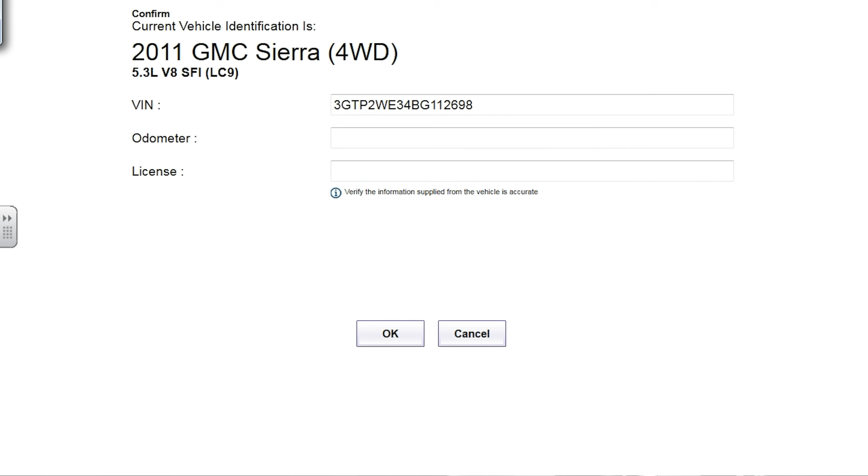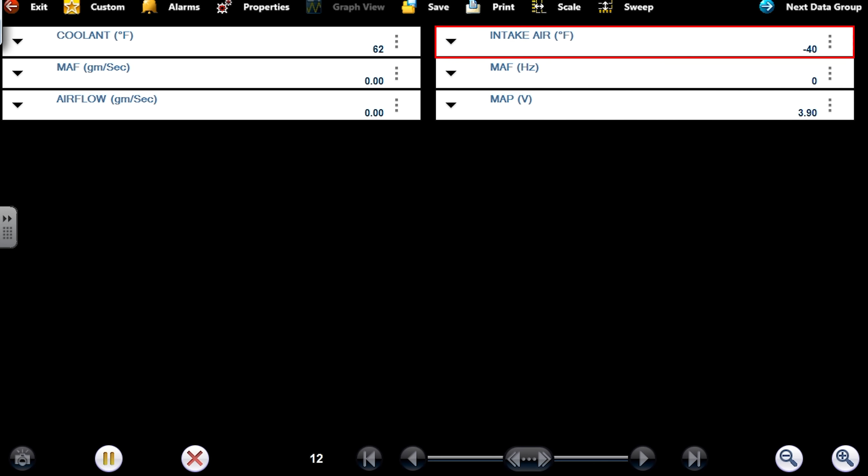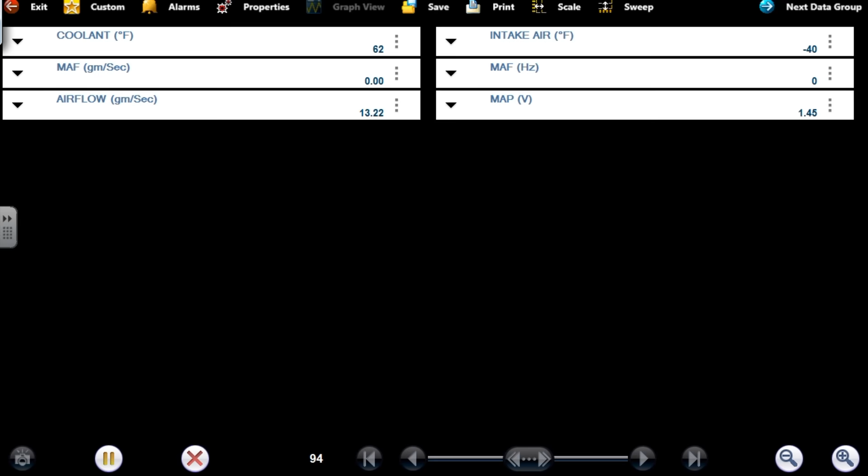Yeah, so we have a 102 mass airflow sensor circuit low and an intake air temp sensor circuit high. And I believe these are hard faults. You clear them and they come immediately back. Let's go to our data display, sensor data. Okay, so yeah, intake air is reading -40, mass airflow grams per second, 0, MAF is 0. Start the truck. Yeah, no mass airflow signal either. Okay, that's what he told me. So we next started doing voltage checks under the hood.

That's where we're going. For you guys that aren't aware of thermistor circuits, when you have an open in a thermistor circuit, it will read high voltage and it will read very, very low temperatures. So when you see -40 on a thermistor circuit, that is a red flag that you have an open circuit. Whether it's an open in the sensor, open in the signal, open in the ground, that's what you have, okay? 100%, that's what we have. Let's go under the hood, do some measurements.

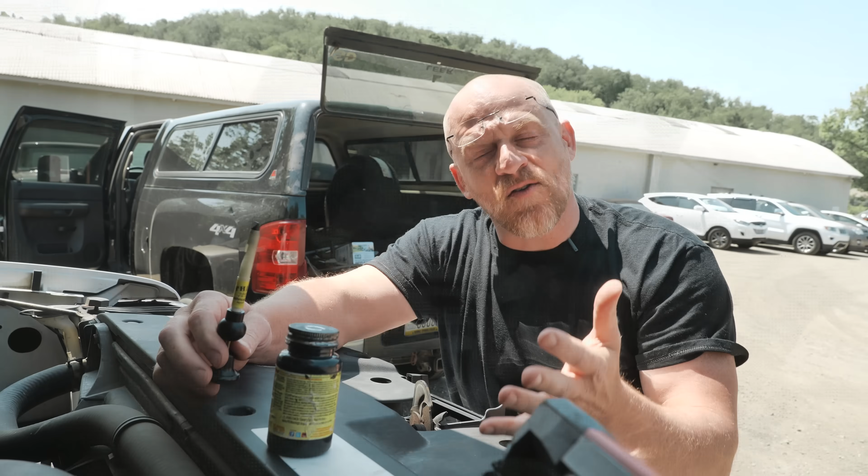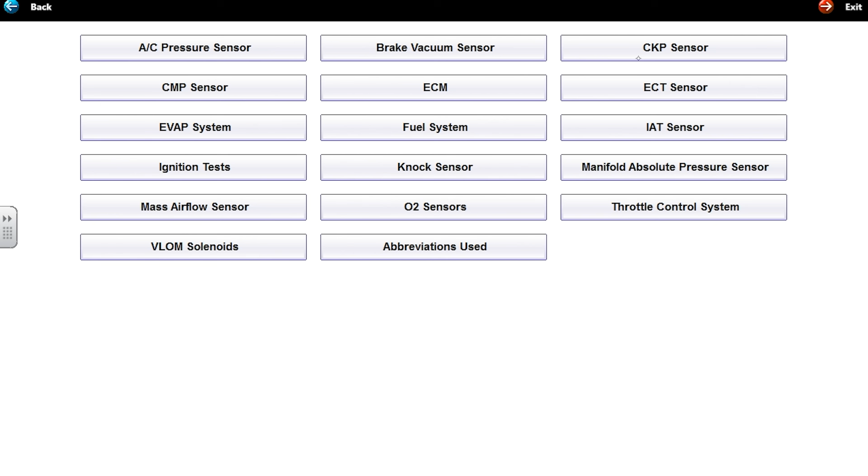People give me grief all the time because I'm gonna pierce these wires, just given location and ease of doing it, and I never show fixing them when I'm done. I'm gonna show that today. I know from GMs, they've used the yellow wire forever for the mass airflow signal, so that should be this one, and that should be a steady 5. I'm interested in that, but I want to see plugged in first what we're seeing on these. So guided component tests, mass airflow sensor. Sweet. All right, so pink wire is ignition voltage.

I had Pete check that, and this is not a battery source, ignition source. So the engine's got to be running for us to have power there. The yellow wire is the mass airflow signal. So we'll go after the MAF signal first. And black lead to a battery ground, which is under your hand.

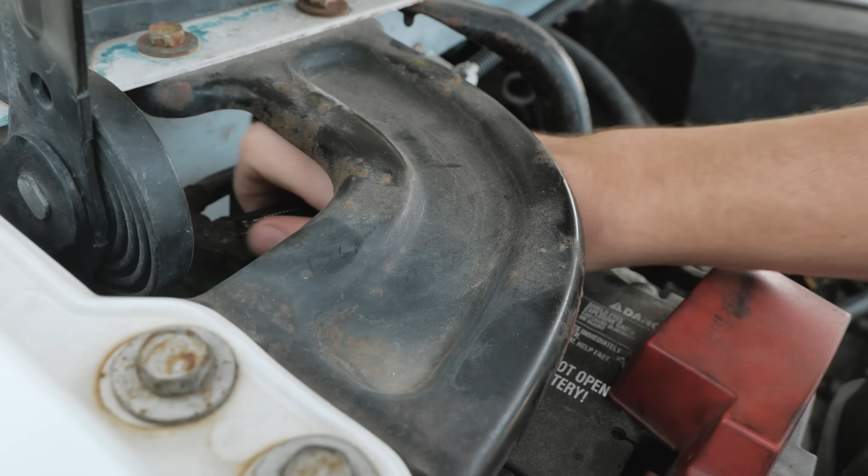All right, so remember these colors too. The IAT is the tan or tan black, and then the low reference is tan, for the intake air temp sensor circuit. Pink is ignition, and then black and white is the ground. That'd be your MAF ground. So those two guys we're gonna focus on next.

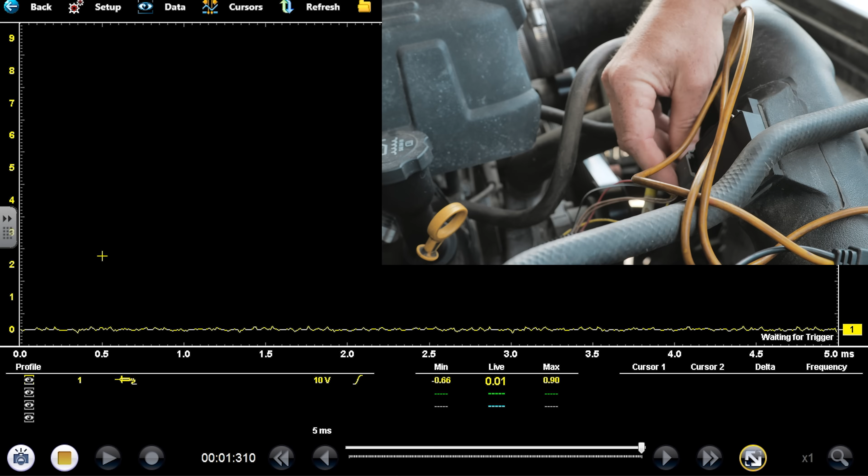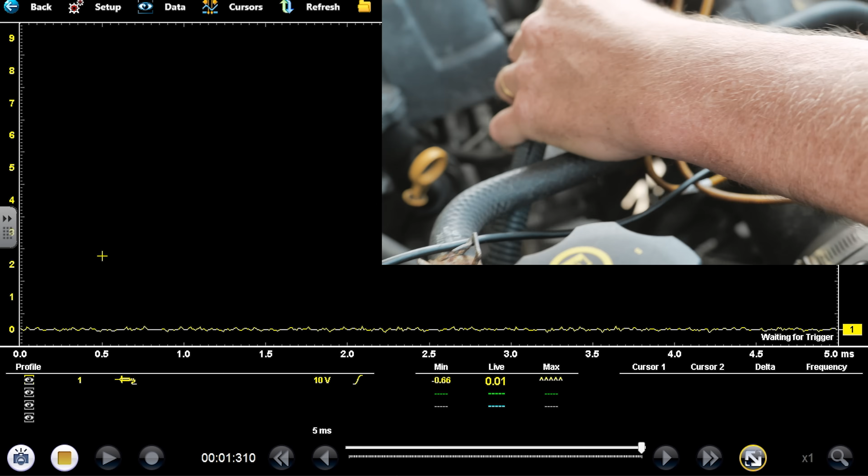Yeah, I have no signal here at all. Do I have the key on? I think I do. Yeah, key was on. And we should have 5 volts on this right now, and we do not. So that's a problem. Let me unplug it just to be sure. Like I said, these are 5 volt pull up designs. Unplug, no voltage. This is not a problem with the mass airflow. This is a problem upstream for sure, whether it be an open in the wiring or a computer issue.

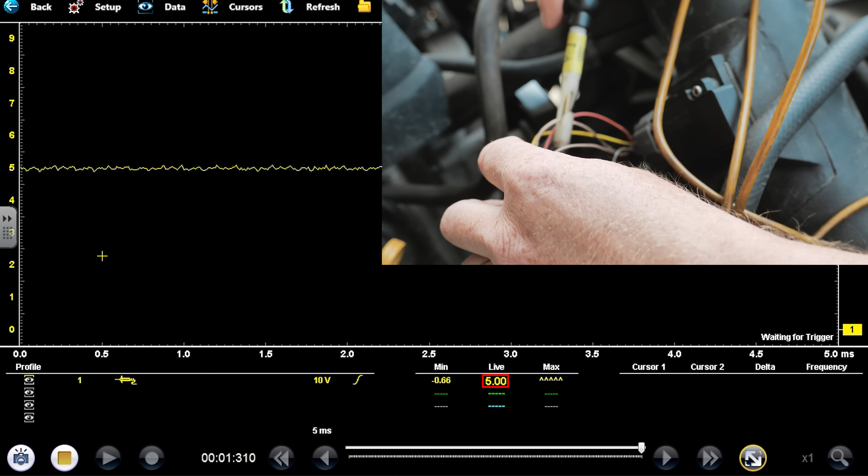Now I'm moving to the IAT wire. So the tan and the tan black. Tan should be the IAT signal. Reading steady 5, and that is plugged in, and then that ground voltage is too high. Okay, some integrity testing you can do. This is something anybody can do.

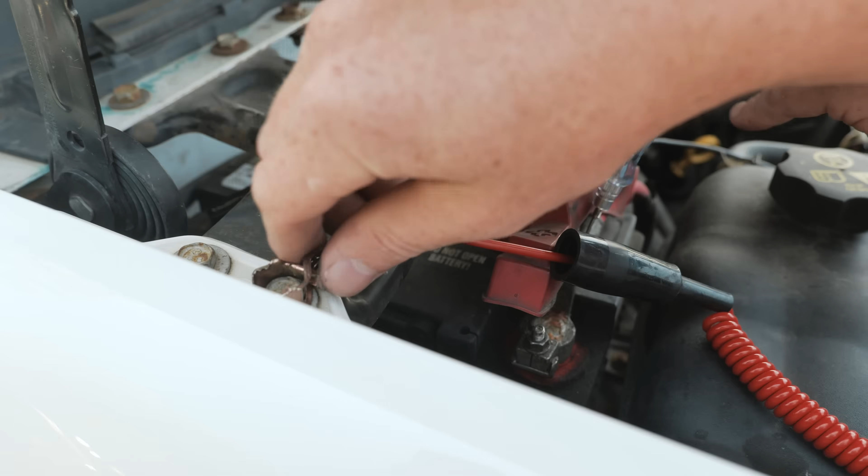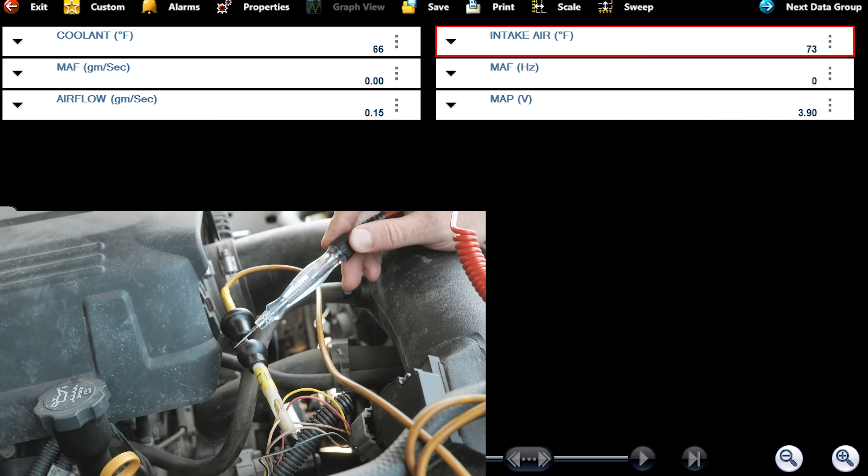Go back to the signal wire real quick. Take our test light, go to a ground, go back to my scanner. See, I'm reading -40, and that's an open, that's 5 volts. So I'm gonna touch on the probe and pull this to ground through my test light. Watch the scan tool. Weird, that only went to 75 degrees. Why is that? That should go way, way higher than that. What's the computer doing right now? That is substituting a value, I believe.

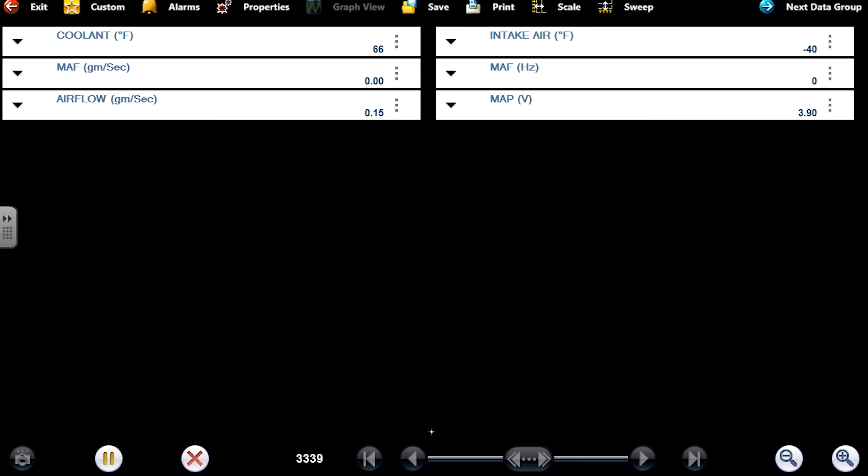So when you have that, we wanna go OBD direct. In the global mode, they're not allowed to substitute data. Okay, intake air, look at this guy right here. So -40, open circuit, ground it to go full hot. It's still only going to 75. Am I grounding the wrong wire? Oh, I might be. I'm on the sensor ground, shoot. Okay, signal wire, tan black. Okay, watch it now.

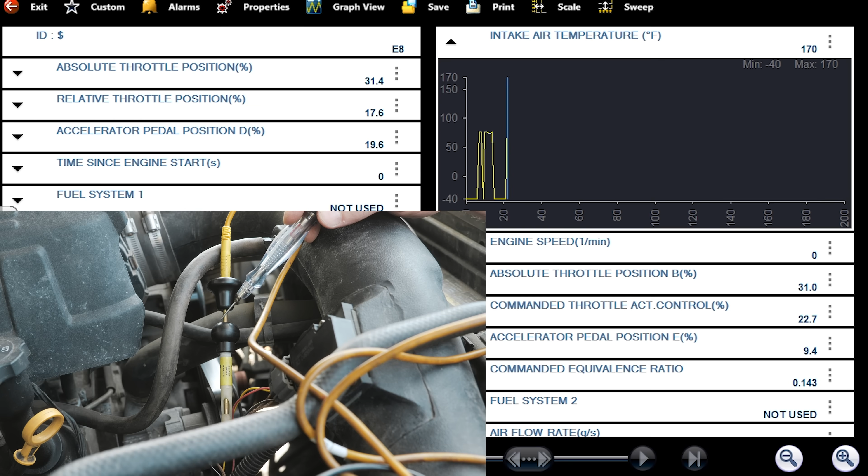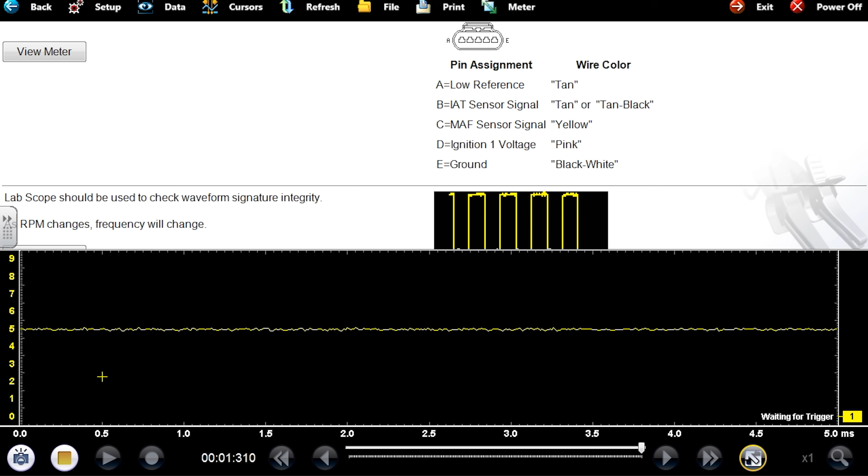That is so slow here. Went to 170. Should go higher than that. Sorry, I'm adding variables to this as I'm going. I don't mean to. Just remember that though, these vehicles will substitute values. Okay, I'll just double check my wires here. Low reference is tan, and intake air temp signal is tan or tan black. So my probe is on my tan black wire, okay? And you can see we're reading a steady 5 volts. 5 volts on that sensor is an open circuit. We know it's open because of the ground.

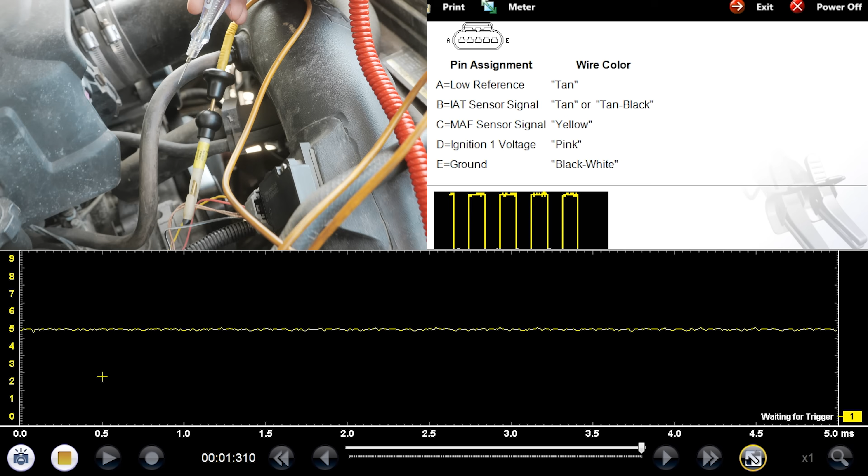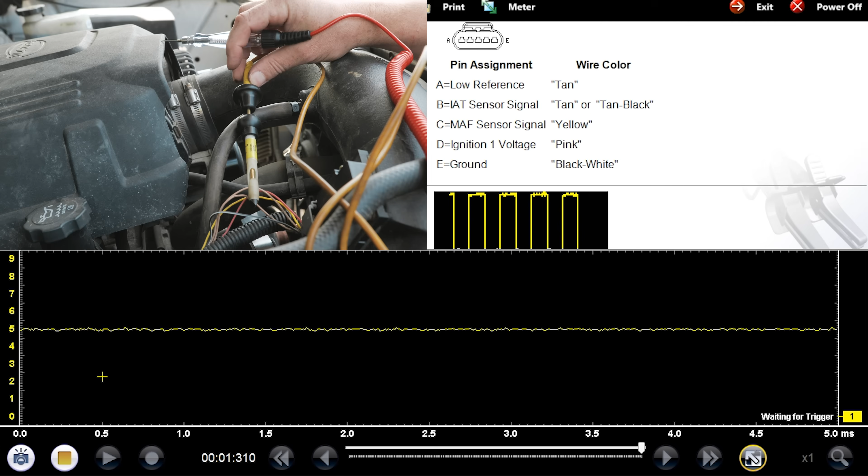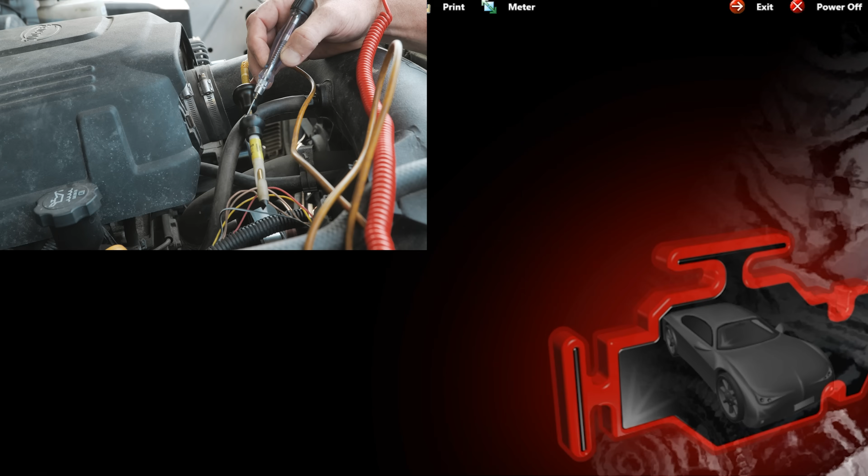And then what you can do is look at your scan tool. You see the reaction of the intake air. We're now at 180 degrees. If you fully ground that circuit, it would get even higher. My test light's adding some resistance to it. But it's an integrity test you can do on these sensors, grounding the signal, opening the signal, looking for reaction.

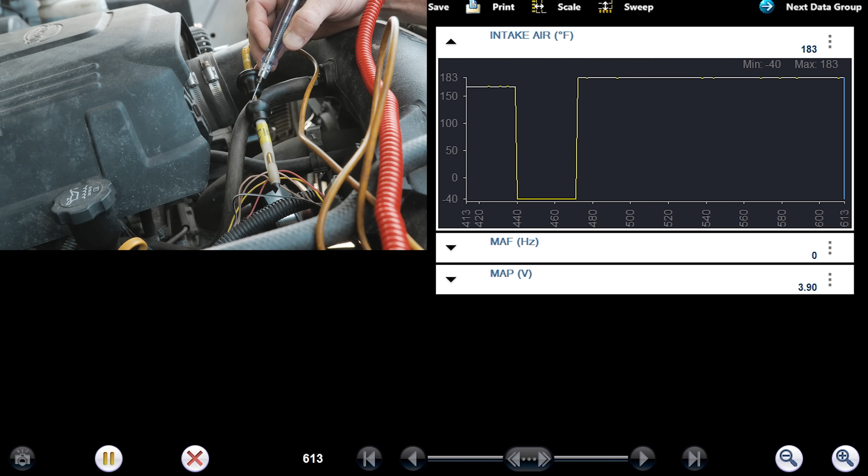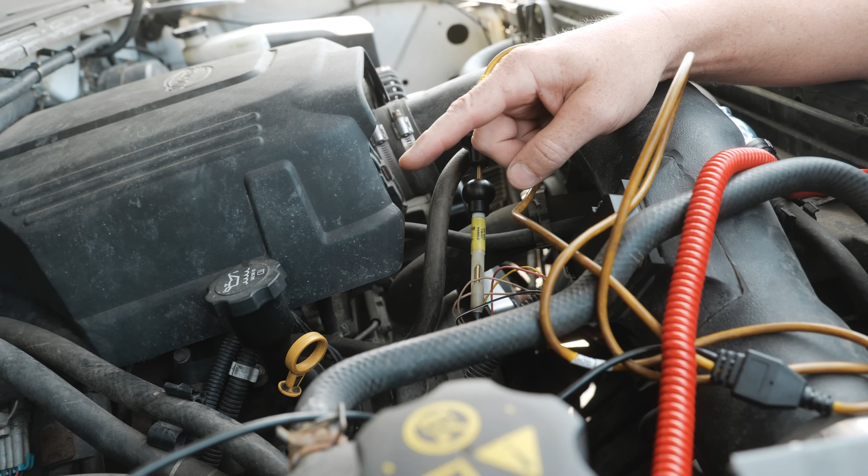Clearly we have an issue with our sensor ground. And I say clearly because watch, moving this over to the sensor ground circuit, see my sensor ground's at 5 volts too. And then we have no signal on our MAF, which is our yellow wire. So what I want to do is follow this harness and look for rodent damage. And it's possible that we have some, just given the way that looks up there. See the fiberglass insulation, and then back there too, all in that back area.

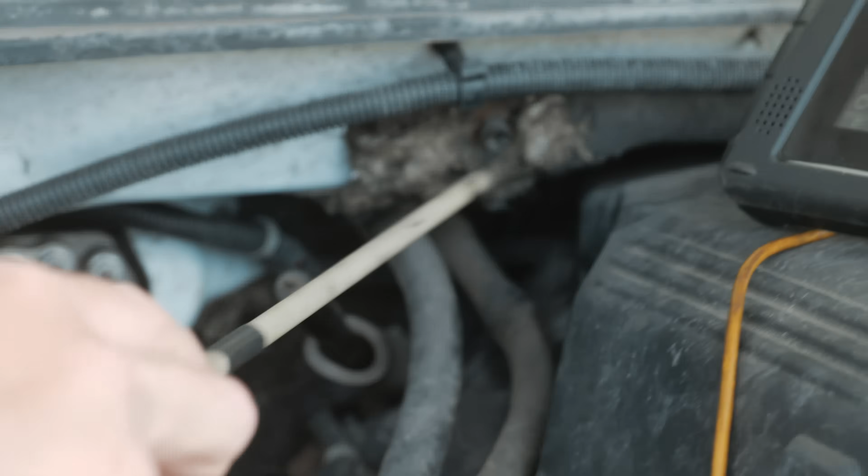So the harness runs where my hand is, then goes underneath a lip down here, runs across the inner fender and then up to here, okay? And then follow it over, and right where I was talking about before, in here and back in here, you see it looks like rodent stuff. Look right there. And I'll bet you $1,000 that we have a broken yellow wire right there and a broken tan wire.

The yellow wire is a mass airflow signal. Tan wire is the sensor ground circuit for the intake air temp sensor. So there's your broken yellow wire, you can see. And then one of these tans is the intake air temp sensor ground. Solid tan, then white, and a purple.

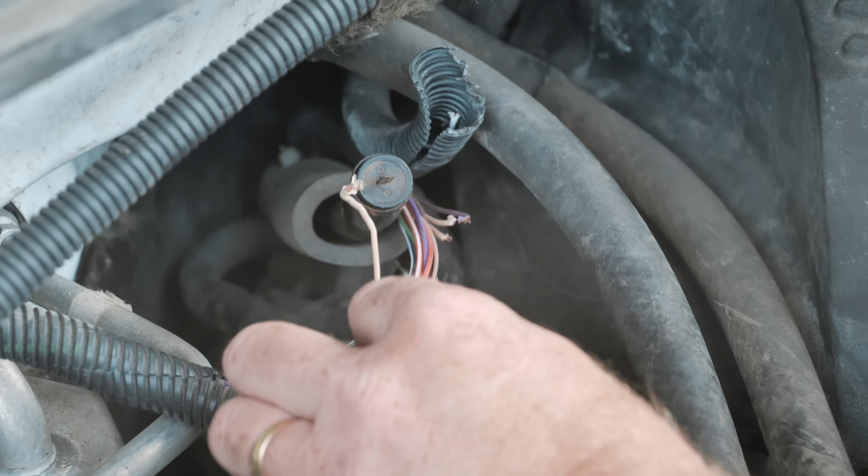But I did say $1,000, didn't I? You did.

There's your two wires. What these other circuits are for, I don't know. We didn't interrogate the rest of the system. I only went after the engine computer, but we'll fix them all.

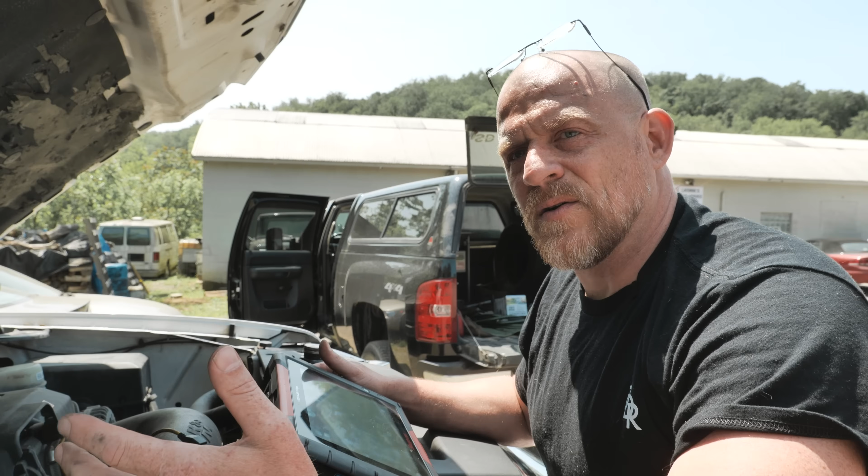And before I forget, if you have a scan tool, maybe you have a minimum function scan tool and you can't read a data parameter for, say, the intake air temp sensor, what you can do is, you're reading -40, short that sensor out, pull it all the way down to 0, clear your codes, reread them. Remember, we had circuit high codes before, and you can set circuit low codes when you ground it.

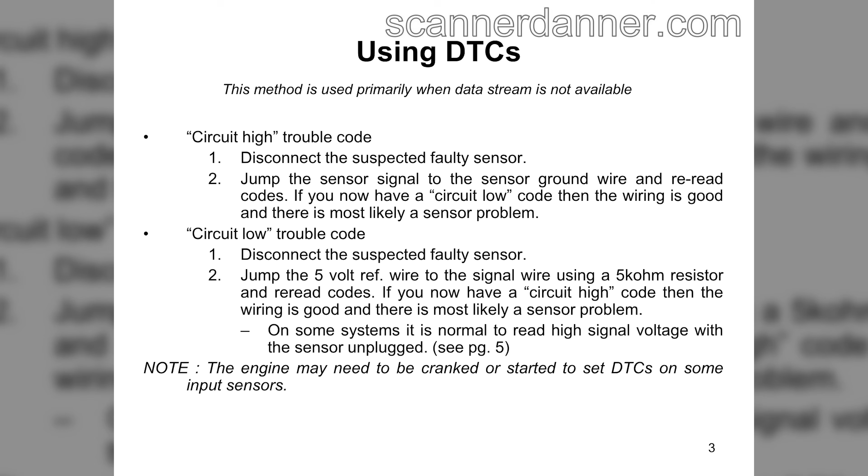And what does that tell you? If the code changes from high to low, it tells you that your circuit integrity is good, computer to that component. So that's chapter 10 material for you guys following along, signal circuit integrity testing. I cover this stuff extensively. And this is the foundational, fundamental information that applies to everything.

I just had a guy the other day who works on forklifts. Same thing, same 5-volt reference circuits. Pretty cool stuff, universal. And that's where we're at. This is an easy catch, and this sensor was replaced. It did not need to be. I believe it was replaced by the customer. And this is another example of why you want to pay for diagnostic work. This will be cheaper than paying for a mass airflow sensor.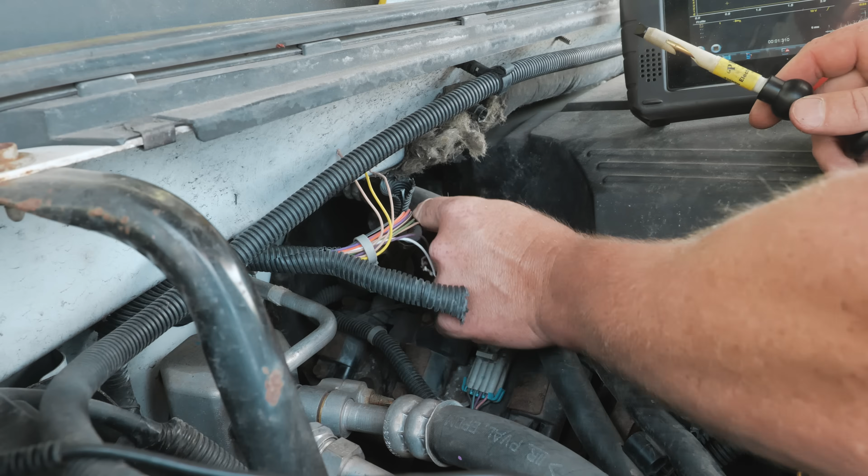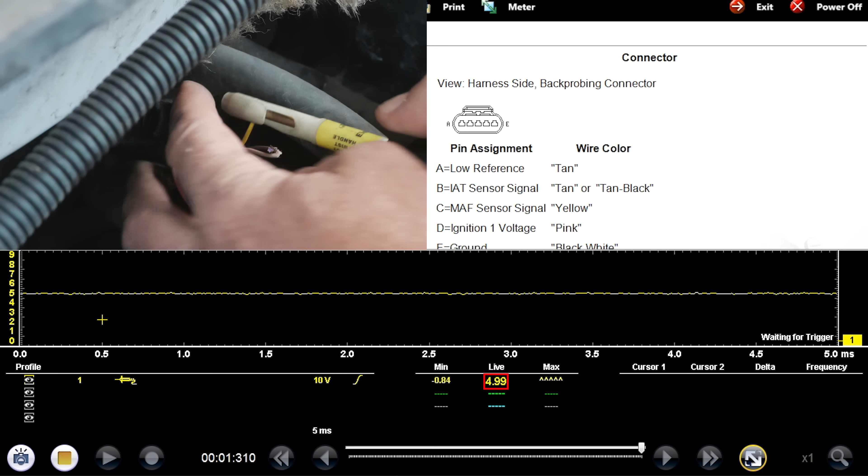Never needed one. Voltage. So reading 5 on my signal. That was the intake air temp sensor signal. This will be the mass airflow signal computer side. This should be 5. There it is. 5 volts. That's what we wanted to see. The IAT. So which one's which here? Because I don't want to mix these up.

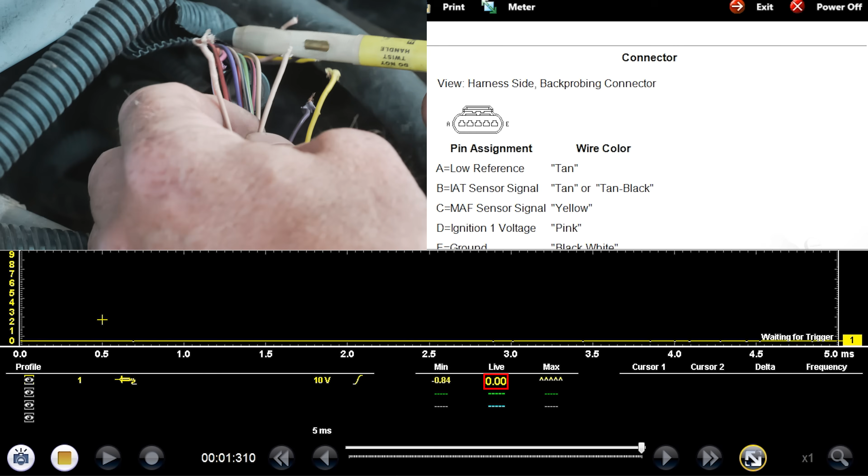It might be a shared circuit. That one's 0. That one's 0. Let's see what these guys read. That one's 0.1. This one's going to be 5. So that's my intake air temp sensor ground. Which one do I connect it to? And what does this go to?

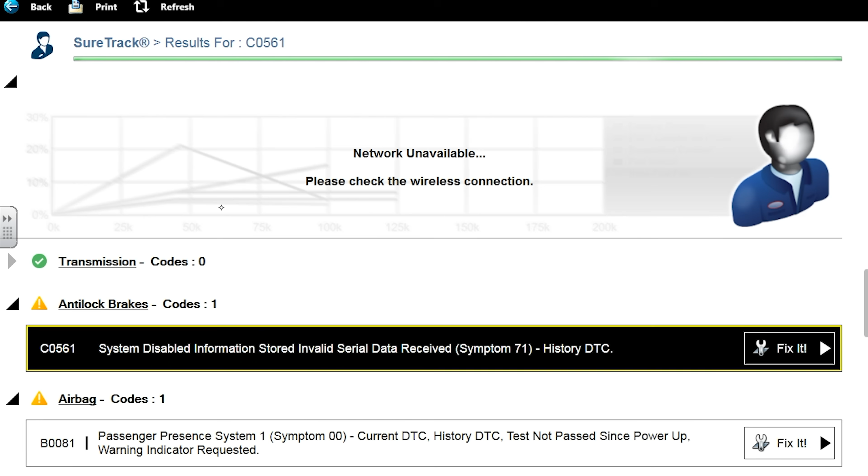Let's do a full scan because I want to know what else is not working. Let me clear these codes. We definitely have other circuits that aren't working. That's weird that I'd get 0 engine codes right now. I guess maybe I need to start it. So in the HVAC system, I have some temperature control feedback codes. Tire pressure, passenger seatbelt tensioner, theft deterrent. I should have run this first.

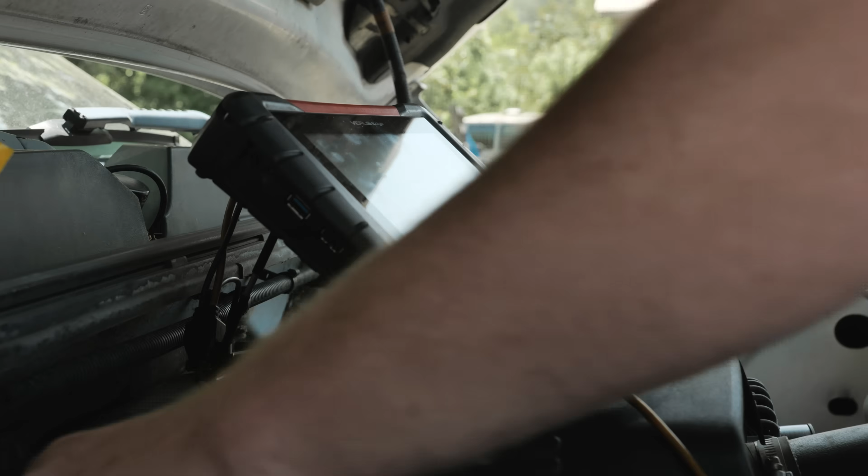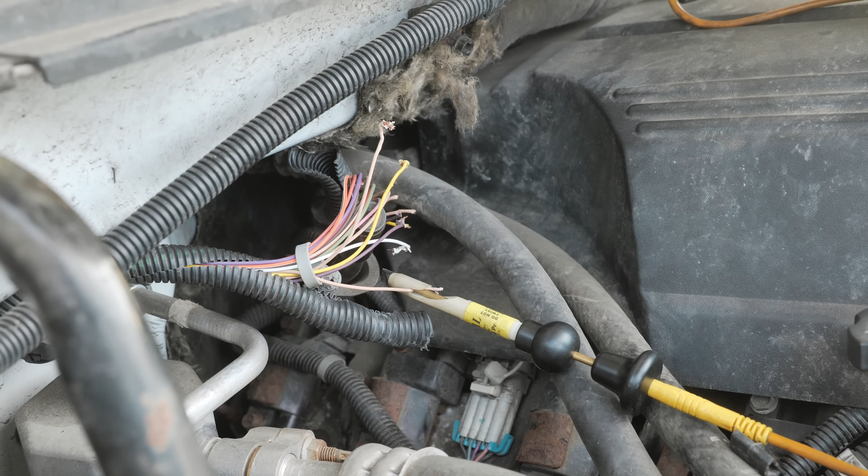I just don't want to hook the 2 tan wires. I think they're probably both sensor grounds. I just don't know what else is there, and I don't want to mix them up in case they are different. I'm going to start this real quick and see what codes we set. Yeah, it doesn't even want to run. Normally these have pretty good backup strategies.

Code scan again. Why is it not setting any engine codes? That's why it's not running. It's not recognizing this fault yet. I'm interested in this tan wire. All right, so I'm just seeing where this is shared, if at all. Okay, so it's not. It's a low ref by itself. I don't want to mix this up.

I want to make sure I have it right, but I want to know where that other tan wire goes. It does split, and it comes over this way. No tan wires there. Does not go inside like I thought. So the HVAC system is maybe not on here. Okay, it goes down underneath. O2 sensor maybe. Like I got 2 freaking gray wires.

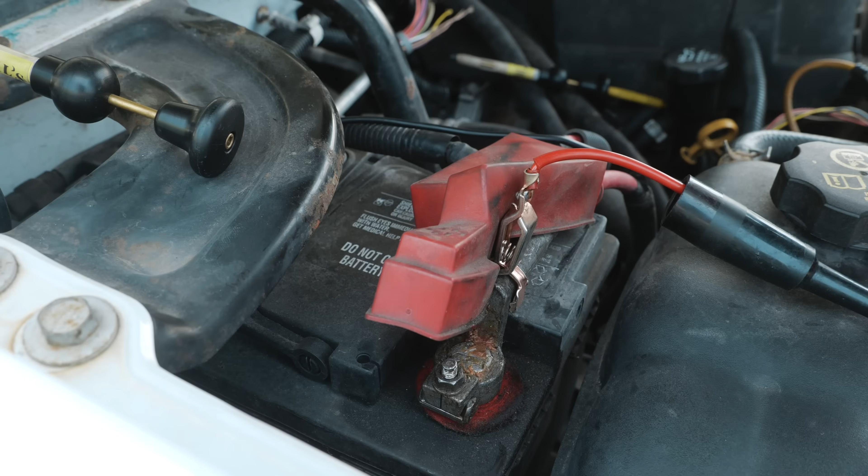Okay, let's do something a little unorthodox. I'm gonna go battery positive with my test light. A sensor ground will light my test light, and I'm not gonna hurt my engine computer doing this. Okay, harness side. That one lights it, and that, oh damn it. I wanted one to not light it, so they're both showing me a ground.

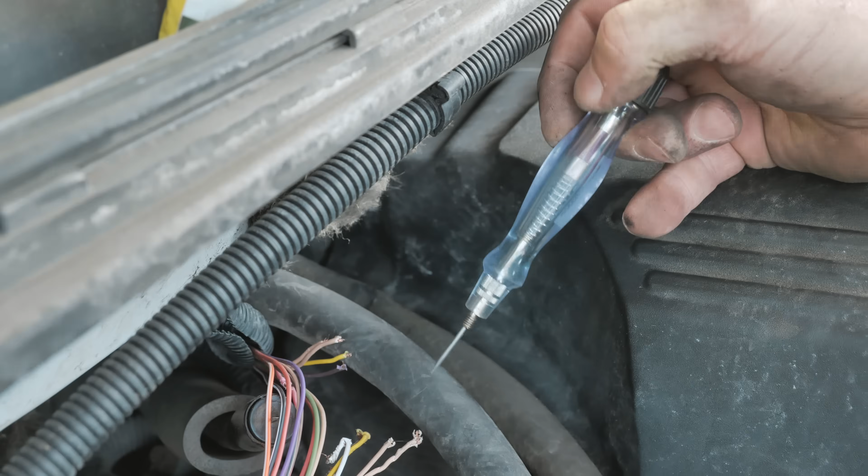What's the second gray wire? I want to know what that second gray wire is used for before I connect this. I don't think it's HVAC, so I don't think it's that one. Disabled information stored, invalid serial data message received. So I almost need the engine running longer because I'm not setting engine codes.

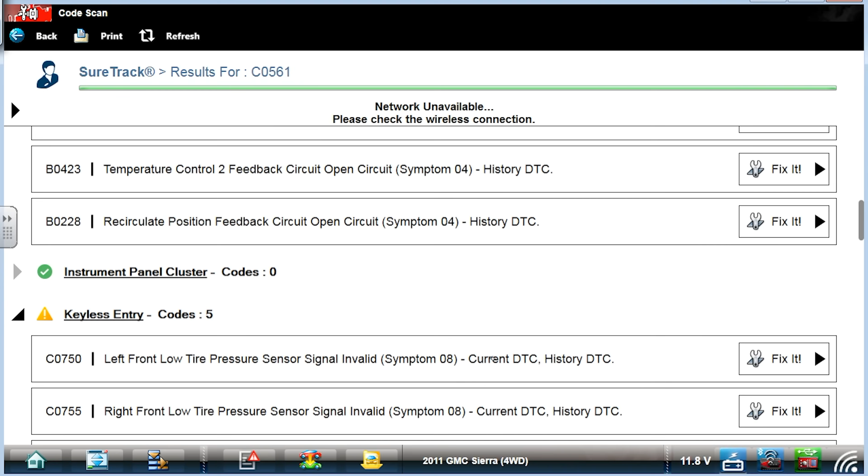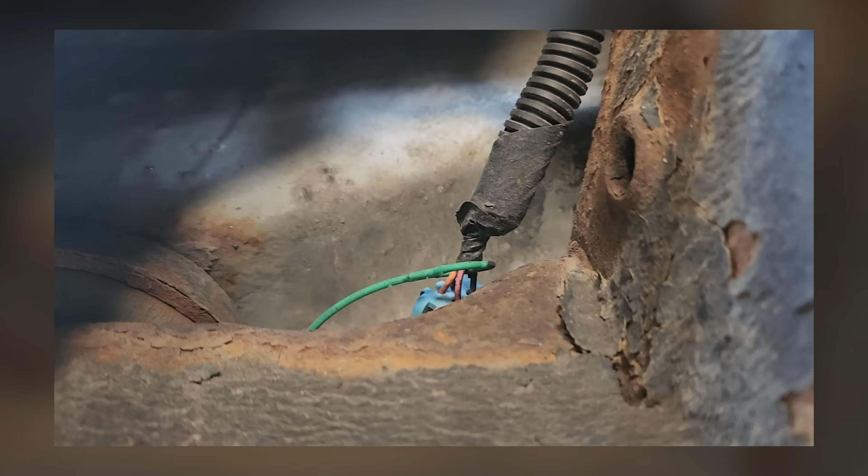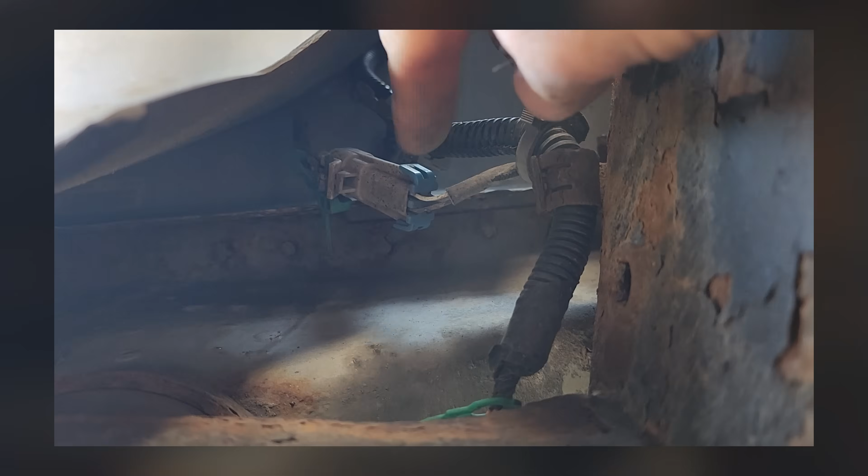Let me look underneath. Okay, so oxygen sensor here. This is my downstream, and it comes across the frame up to. You see me pulling, tugging on that right there, right? That's the downstream, and then the upstream is that connector. It loops over, goes that way into the exhaust. So we have 2 oxygen sensors feeding up into this leg, and that's where that other gray wire or tan wire is.

Okay, so I feel better about using either gray wire because of that, but let me go back and show you guys the oxygen sensors. The reason we don't have an O2 code is somebody was in here, cleared them, and we never ran it long enough for it to generate that oxygen sensor code. But if my O2 sensors show me tan wires as the sensor grounds, then we're gonna be able to use either one. So this would be bank 1, this is gonna be bank 2.

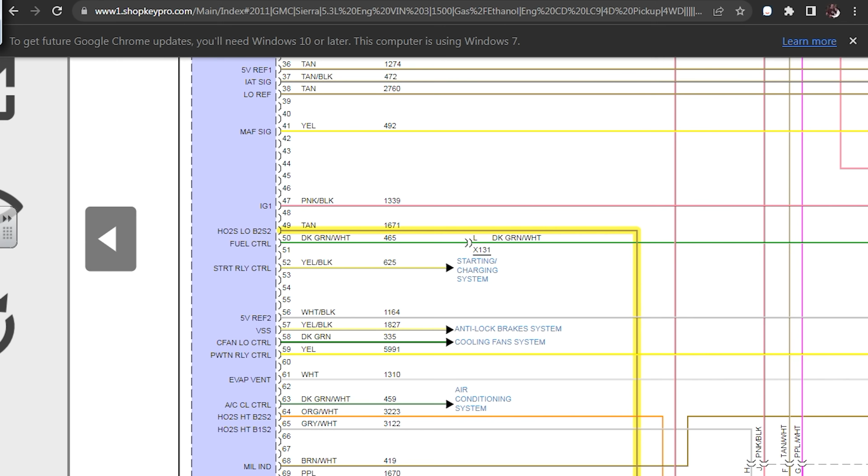The bank 2, sensor 2 has a tan wire, and anytime you see low, that's a sensor ground. So that's a tan wire for that. It shouldn't matter at all. I can use either one, but I wanna show you guys something that might be really cool. So we'll go back to our engine. We'll pull up our data. I'm very much interested in what my sensor data looks like on bank 2 for the oxygen sensors.

Now we can fix the other ones first, get it running, and then I'll be able to tell which sensor, because the sensors are cold. They're all showing us a bias voltage right now. What I was thinking is, I believe all the sensor grounds are shared internally. I realized I could do a resistance measurement from the engine computer and figure out which pin it is. But that's a real pain in the butt on these with those connectors.

I'm just trying to think of an easier way to prove which one is the oxygen sensor ground circuit, which one is the IAT sensor ground circuit. I'm just not sure that I can, because they're both grounds. I can tell you guys which one the O2 is and which one the intake air temp sensor is on this side. But that's not gonna help me on this side, because these both go to a ground on the board. So in this case, we're just not gonna worry about it.

I'm just gonna connect them because they're sensor grounds and they're both sensor circuits on the engine computer. It is not gonna matter. If I have any evidence whatsoever in length of wire, I kinda do. See how that one's longer? Mm-hmm. That one's shorter? Mm-hmm. See how that one's longer? Yeah. And that one's shorter? Oh, there we go. It's good enough for me. That's good enough for me too. Longer one on this side to shorter one on that side, right? Remember that. I'm going to the shorter one on this side with the longer one here.

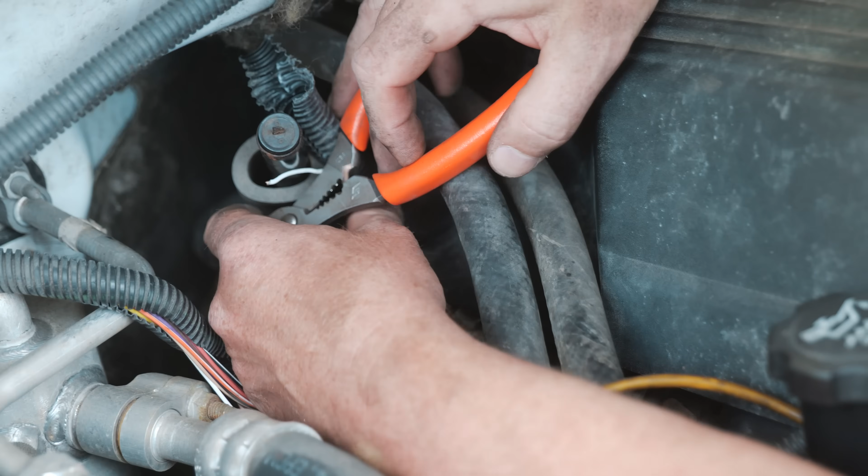Okay. Oh my goodness. I need something to lay on. This is awful. I'm literally gonna lay down. I just won't show on camera how you're... No, go ahead, show it. Now I'm comfortable. I can't reach it. It's like the wrong... No! Come on! Guys are like, you should only solder and heat shrink. Okay. I'll take note of that for next time. I don't think we need to show all of these. No, I'll just get a couple shots and then we'll cut to after it's done. Because then I can MF things at will.

Yeah, you can. These are the sealant type crimp connectors I'm using. There's a goo that once you heat them up, it helps seal out any moisture. All right, we're gonna get the rest of these done, and then we'll get a shot of us heating them up, and then we'll get some voltage readings when we're done and call it a day.

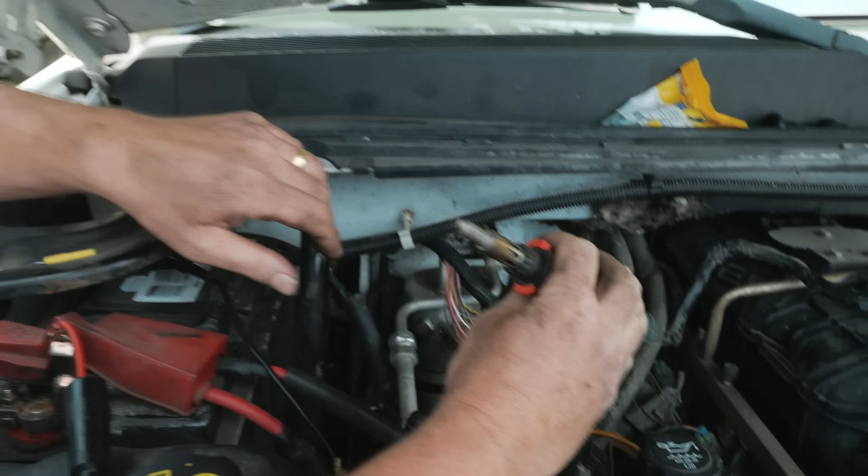You haven't used this before. We'll try it. I think I remember you trying it one time and hating it. Did I hate it? Yeah. I guess maybe we thought it got in the way. Yeah, it's kind of inconsistent. It's burning me. Yeah, I think I remember trying to use this and just not liking it. We like the flame by itself. Just use your hand as a heat shield. Nope. Uh-oh.

As far as the sensor grounds go on this, sensor grounds are generally shared. They have been forever. Externally from the computer, you'll have a splice pack and sensor grounds are all shared. So I have no problem doing what we did. Even if I got the two grounds mixed up, I have no problem with it at all. Okay. Now before we finish that, let's start this up. Starts and runs and stays running.

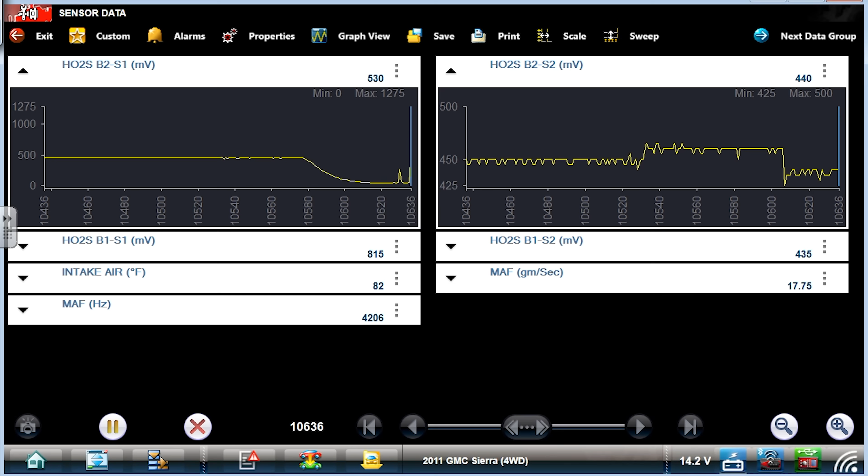We'll watch our bank 2 sensor 1 and our bank 2 sensor 2 oxygen sensors. We'll make sure that those are warming up. Yeah, see the bias voltage dropping down real quick. Perfect. That's what we want to see.

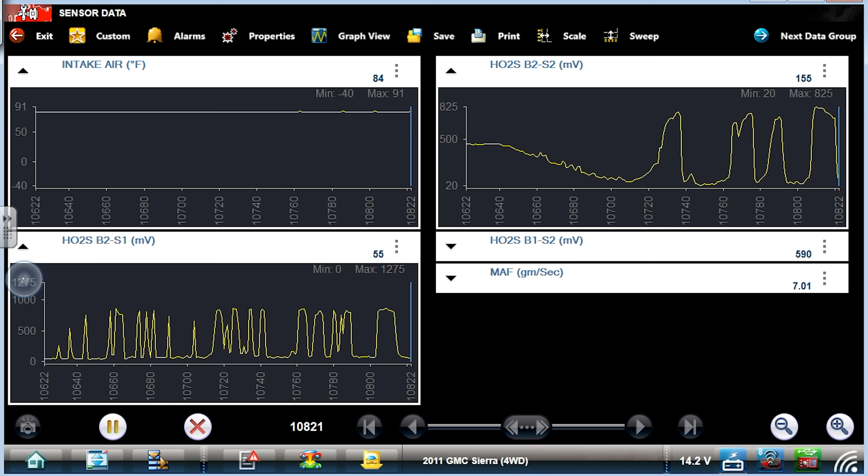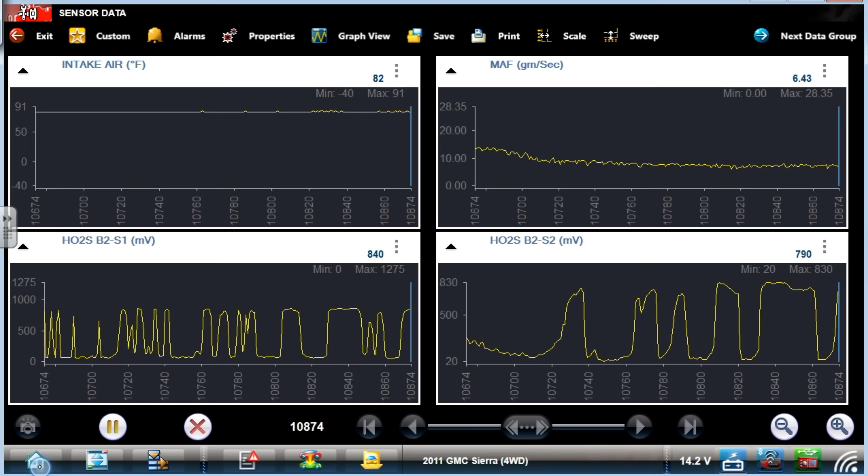I'm comfortable with those O2 signals. That looks great. Our intake air temp sensor looks good now. And now we have a mass airflow grams per second reading, which we did not have at all before. All right, let's show you some manual tests. Go back to our scope and get this connected back to my yellow wire.

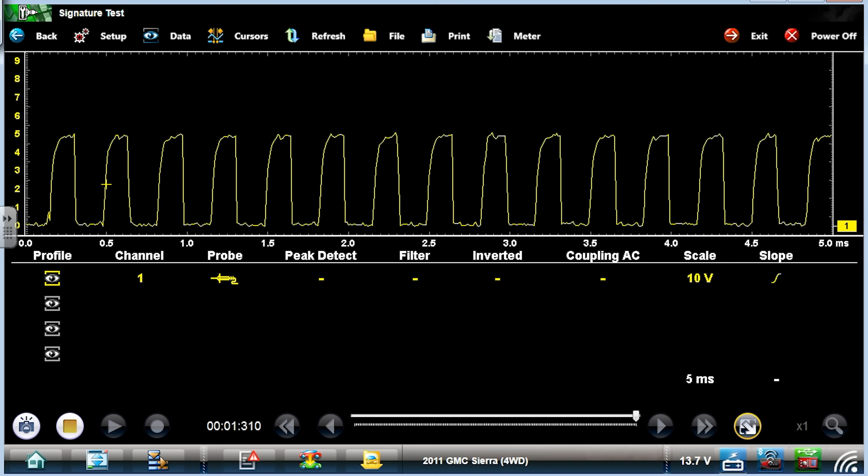Should be a digital signal. Yeah, there you go. A little bit of a kind of curve to these signals, but that's pretty typical. As the RPM changes, that frequency is going to change. So I'll just go in, snap the throttle. I'm not going to be able to see that at the same time, but what you're going to see is those square waves are going to get real tight. Watch. Digital type mass airflow sensor. This is a design GM has used forever.

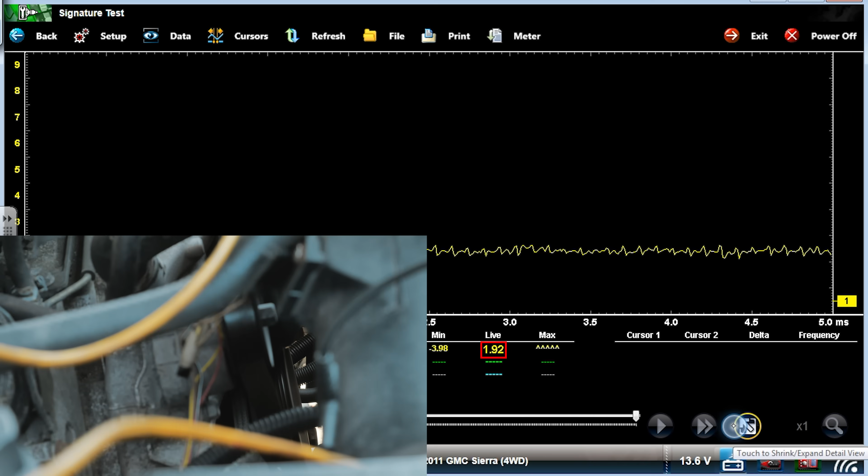And then I'll get you voltage on the intake air temp sensor, which was the brown with a black tracer. And that's my voltage signal. Some noise in there, some hash in there, just because we're using a lab scope on a really small time base. There you go, 1.92 volts. We didn't see that on scan tool, we just see degree Fahrenheit. But that's good, that's a fix all the way around. I'll just clear the codes out. We didn't have any engine codes anyway because someone did before.

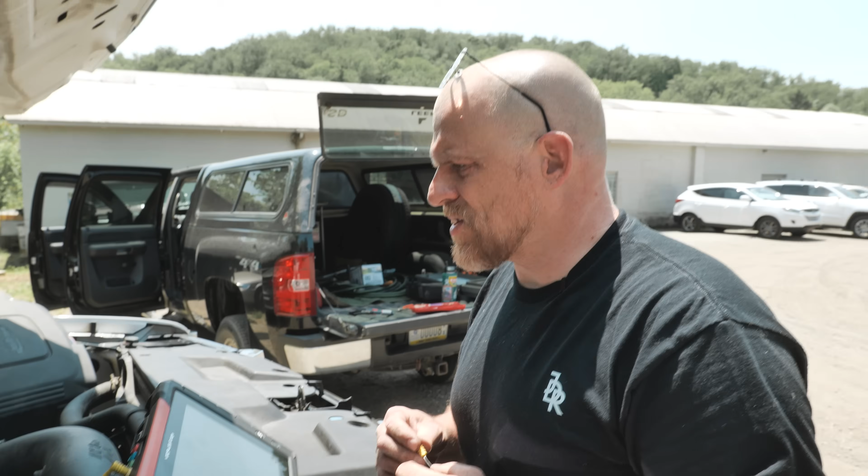And then what's left to talk about with this one? I think that's it, man. Learn your fundamentals. That's key. I was able to help them only so far over the phone. I said, okay, you got 5 volts on your sensor ground. You have an open in either that sensor ground wire external to the computer, or you have a computer problem.

What led me to think that we had damage in the harness is we also had 0 volts on the mass airflow signal wire that's supposed to be a 5 volt sourced pull down circuit from the computer. So we had 2 opens, and I just felt like that suggested a harness issue, and it sure was.

We have rodent issues. We're gonna have to tell the guy about that, and he's potentially gonna have other issues with this truck on where he parks it. He's gonna maybe have to take some steps with that. I heard like peppermint oil, some different things you can spray under the hood. The best thing is one of these guys, right?

I'm gonna put in the video Bean puking. I was thinking the picture you have of Bean where he looks all majestic sitting in the yard, like that one. So you need one of these guys for sure. We haven't had any issues at home, and we have, you know, 4 cords of wood sitting in the yard all the time, and all kind of vehicles parked there, and never have rodent issues when you got a cat. So that'd be the recommend too. Recommend getting yourself an outdoor cat.

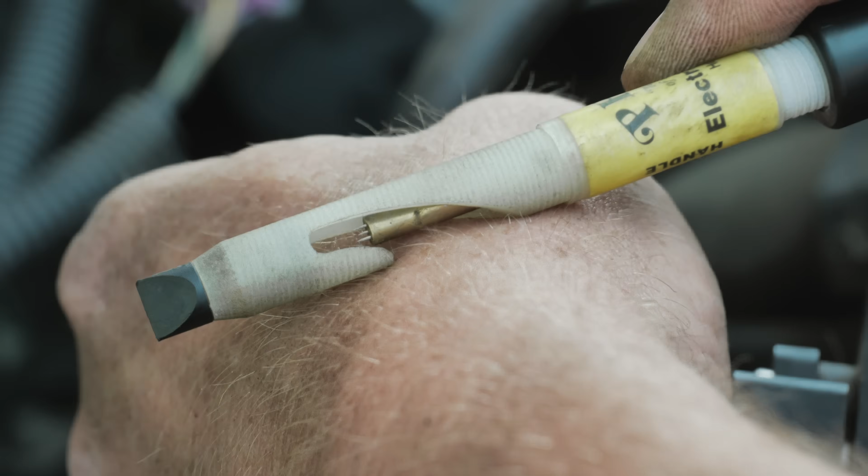Oh, I guess last thing, I said I was gonna fix these. Let's do that. The hard part about this, using this, look how small. Oh yeah, look how small the holes are. Don't move. Like, they're so tiny that you almost don't even need to. Yeah. Like, look at the nails on the tool itself. Yeah. But let's do it anyway, huh?

Yep. Oh, this stuff's all dry. Oh, that sucks. Dude, it shouldn't look like this. It's all dry. I mean, it's been sitting in my truck for a while, and yeah, be all right. People are gonna be like, that's such a hack job. Yeah. Who cares? I just need to put all these harnesses back. I'll handle that part off camera.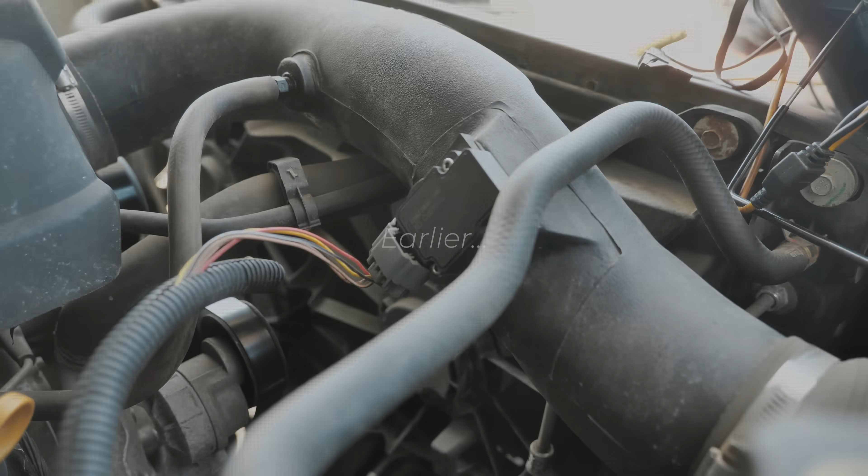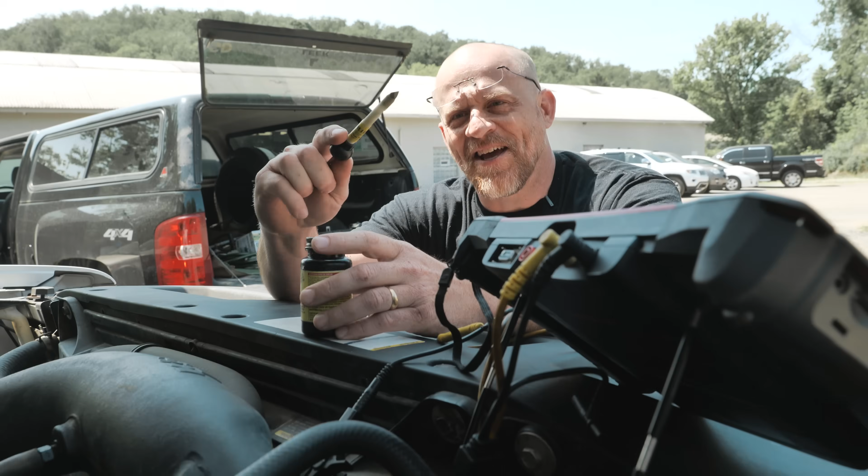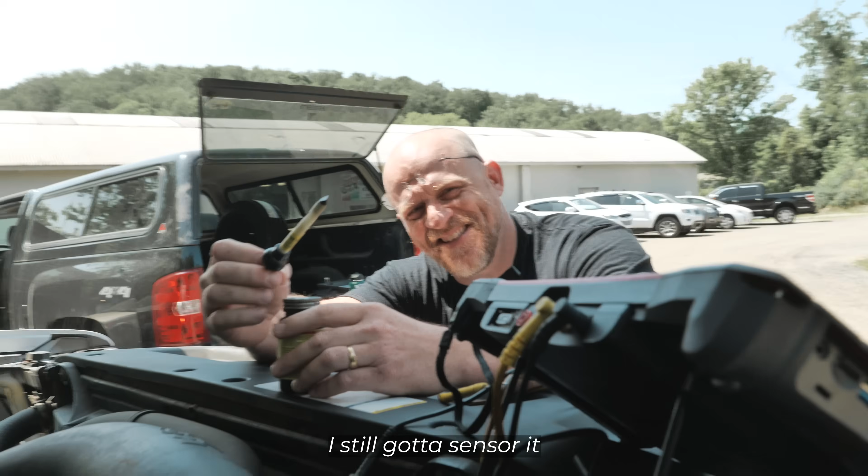Everybody always gives me a hard time. For what? What are you doing? I'm waiting. Well, I'm talking. Okay. Yeah. I know we haven't done this in a while, but so everybody gives me a hard time about piercing. We're gonna use Phil's today. Can we not say that? We can't. Are you sure? Yeah. This is probably going on the paid part of the site, so we couldn't use it. I still gotta censor it. So, I'm sorry, Phil. We're using the stubby probe. We're using Phil's small probe today. Come on, I can't even do this.